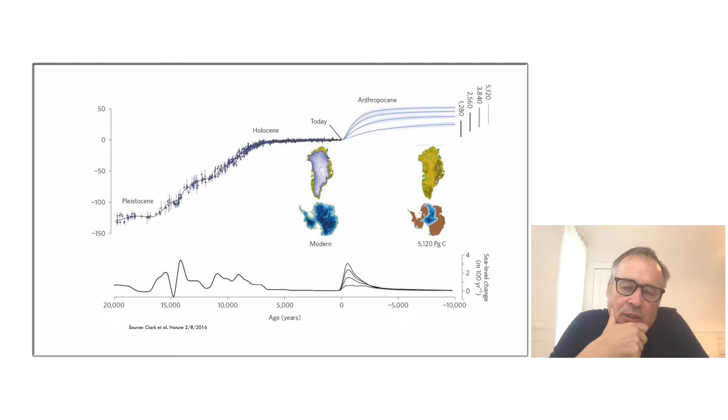One of the things I've come to understand is that we are going into an extremely turbulent period. If you look at this chart from Nature, the big picture of changing climates and changing sea levels, you see that we come from a very stable period, and now with the Anthropocene, the era in which we are changing the workings of our Earth systems, we are going into a period of great change. That great change will at some moment start leveling off, but in a really different condition than we are now.

As someone who is from the Netherlands and who lives in New York, which are both sort of coastal places, as is Malmö, these are things that we need to consider.

What I want to do today is lead you through three continents and see how in different continents we are working differently on adapting to climate and dealing with risks. The first place is New York, where we have a practice and where we've been involved working in this city since Superstorm Sandy. The second place I'd like to talk about, toward the end, is the Netherlands, this very constructed landscape developed over the last centuries - how do you work in that landscape? And in between, I'll take you to Asia, to the north coast of Java, where I'll talk about our work using nature-based solutions at scale for a sinking and flooding coast.

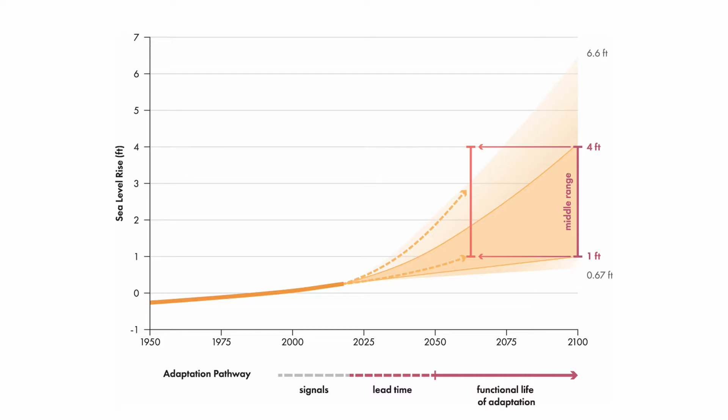So there's a strong connection between the physical infrastructures and the social infrastructures. About 60 people died, and the impact of this disaster on the city was dramatic, and it really caused the city to start thinking: how vulnerable are we? Specialists and professionals had been thinking about it, but for the first time it became public view that a city like New York is largely built in the floodplain.

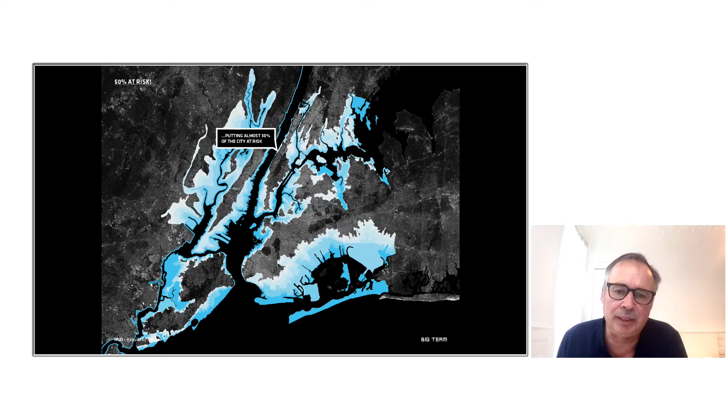It is at a high risk of flooding for which it is unprepared. It doesn't have, like the Netherlands, dikes and protective systems. It is pretty much open to the water. And part of that fragility is caused by the fact that the water has for a very long time been a source

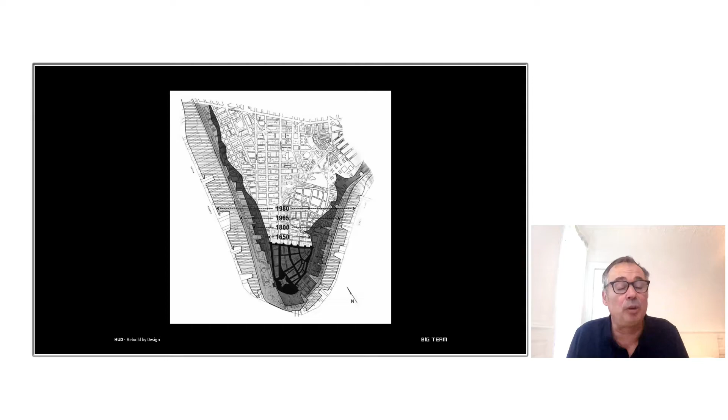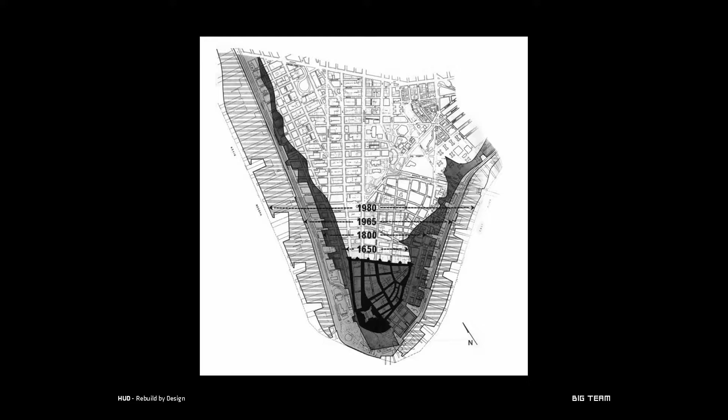of economic growth. We have placed our port areas there, we have reclaimed land — you can sort of start blaming the Dutch for that in the case of New York. In the 20th century we put our infrastructures there, we put our highways there. So we have increased the vulnerability of our lands over time,

leading in Lower Manhattan to a rather deep flood zone, as you can see in this image. At some points, the flood zone is about 6 blocks deep, and you could imagine during a big flood a river connecting the two sides of Manhattan, basically charting Canal Street.

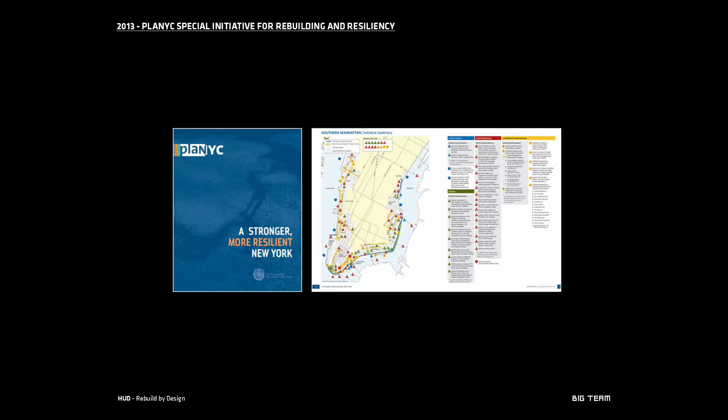The city had proposed, after Sandy, in a special report, a whole host of measures to start adapting to this climate change and storm risk. One of them was an integrated flood protection system around Manhattan.

Temporary solutions at this scale don't really work, and at the same time a wall also would not really work. So what we did is we took our cue from the High Line, where we have a piece of infrastructure that is not used anymore, that has been made into what you could call a social infrastructure, an amenity that has really revitalized a neighborhood.

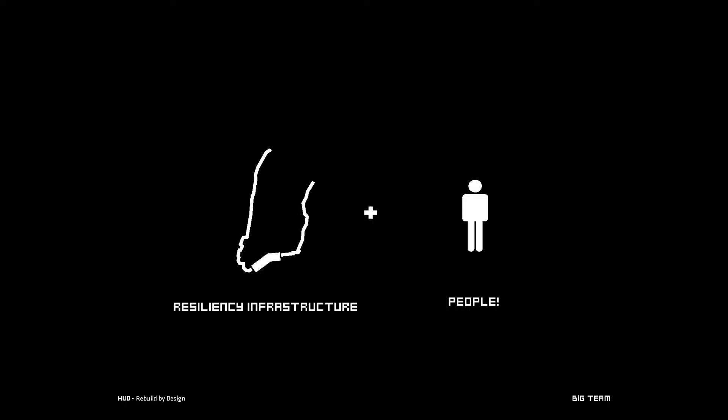And we thought, well, maybe we don't have to wait until infrastructure is not used anymore. Maybe we can start to think about program in relation to that infrastructure very early, because program allows you to think about people — and maybe we can connect the resiliency infrastructure that New York needs much stronger to people and to program.

That led to this idea called the Big U, in which we reconceptualized this large piece of 10 miles of infrastructure as a necklace of smaller infrastructures that would be connected and would protect this geography. By thinking it smaller, it allows us to really tailor-make each piece of infrastructure to the geographic location and to the community it would be localized in. And it also allows us to build this thing in phases.

Our idea was really to say we need the big thinking of Robert Moses, but we need to combine it with the community-oriented thinking of Jane Jacobs, and maybe, as Bjarke says, we should make the love baby of these two. And once you start to come up with an idea like that, it became really clear that, especially in the United States, where there is no culture of doing public projects, and where we really wanted to connect to the communities, stakeholder engagement is a critical part.

It's not really the focus that we need to put on design per se, but really what we need to do as designers is engage all the different people who are in this space and who are thinking or affected by such projects. So we talked a lot to all kinds of public entities, but also a lot to the private sector and to the different community groups. In this competition, rather than really making a design at first, the focus was really outreach. It was connecting to people to understand what they want, but also understand how they go about making cities and how this would be different, because we need to start thinking about different paradigms of what a city could be in terms of a changing climate.

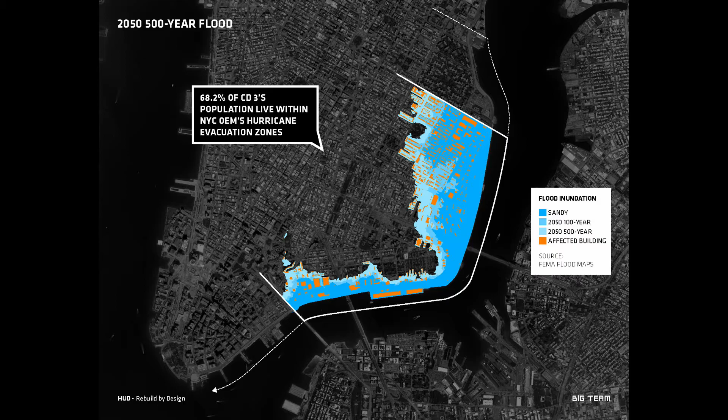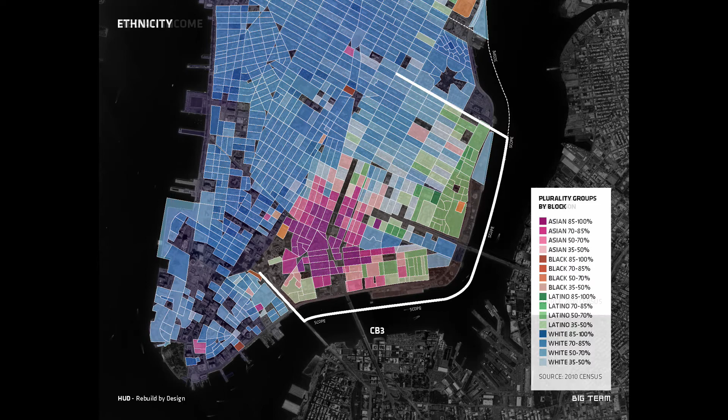Our main collaborator in this was a group called LES Ready, which stands for Lower East Side Ready, an umbrella group of a lot of community-based organizations, mostly on the Lower East Side, which has been heavily impacted by the storm, which has a very, very deep floodplain, as you can see here, which is mostly comprised of large housing complexes called, let's say, towers in the park, very much a product of the Moses era, which has a huge ethnic diversity. The blue parts are predominantly white, the green parts, where we were working, are Latino, and the purple parts are Chinese, which is much poorer than the rest of the city by almost a factor of 10.

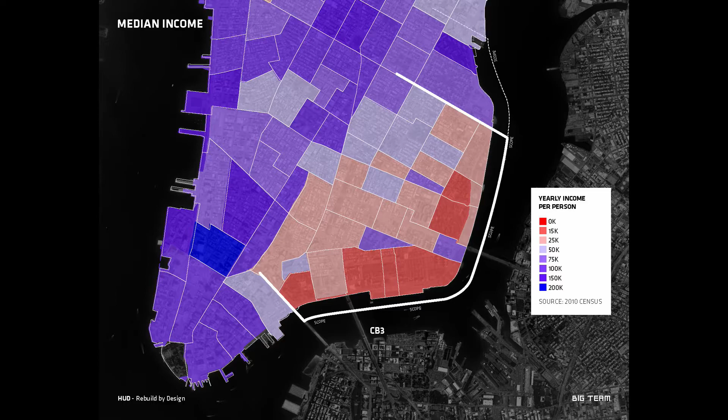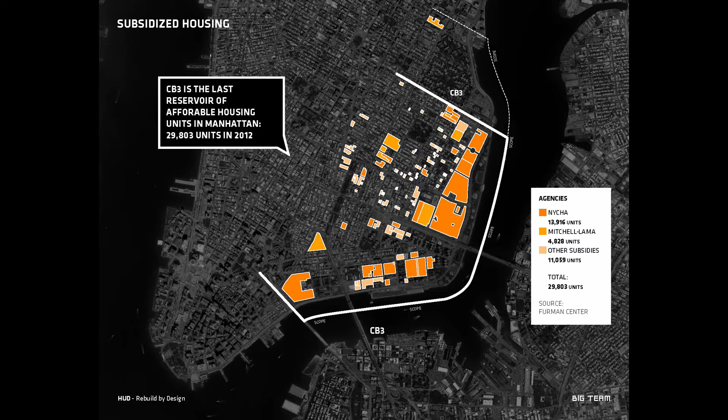If the average household income is about 200,000 plus in the purple areas, it is about maybe $20,000 in the reddish areas, which is, as I showed earlier, this sort of large repository of affordable and public housing in the city, which is all under great stress, not only because there's a constant disinvestment from the federal government in these type of houses, but also because of now repeated impact through climate events.

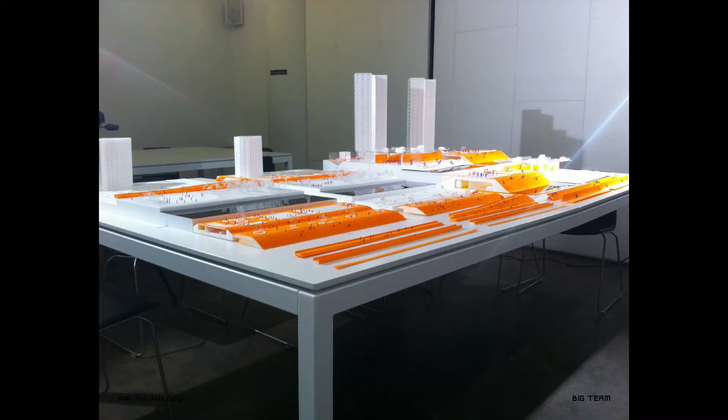Rather than bringing a design in, we brought in a series of models which would have typologies of how you could start to contemplate protecting the coast. Some of those ways in which you could approach it were more like urban furniture, which could have a double function as a social infrastructure. Some of them would be much more integrated into the highway systems or into buildings, but others would be very comprehensive solutions, basically covering the highway, creating a levee, putting a park on top.

What we did is we brought those models into the different communities and then basically had conversations with the communities about how we could start to utilize these solutions in their area. So rather than us as designers coming with a vision and a design idea and starting to sell that, what we really did is we tried to work with the communities on coming up with the right designs.

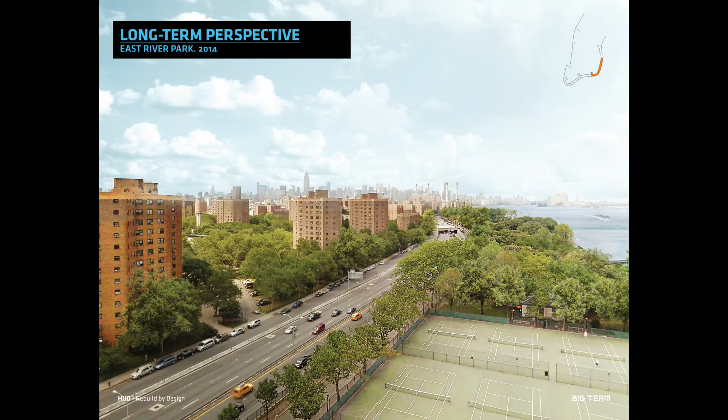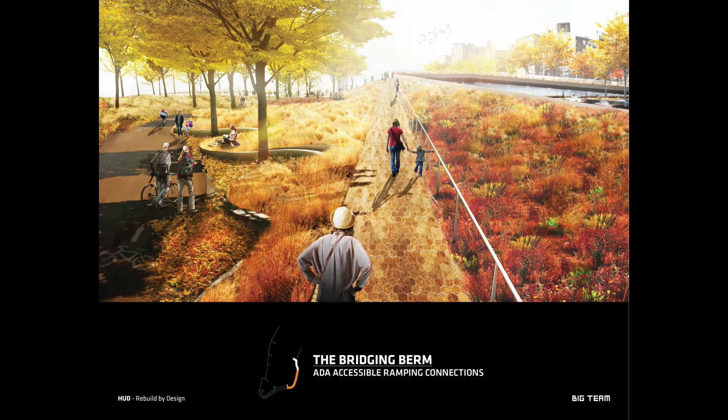And there you see that communities are really fantastic because they have so much knowledge about a place. They have such great ideas about what is needed, that it really allowed us to make a design that is extremely tailor-made. At the place I just showed with East River Park, we'd elevate the surface road in order to create a coastal protection system, but then use that elevation to cross the highway, which would allow this park to finally be used by the neighborhood, because the park is very badly connected to the neighborhood. We're envisioning what that could be in the longer term future, using what we call a bridging berm, which would connect the neighborhood to the river.

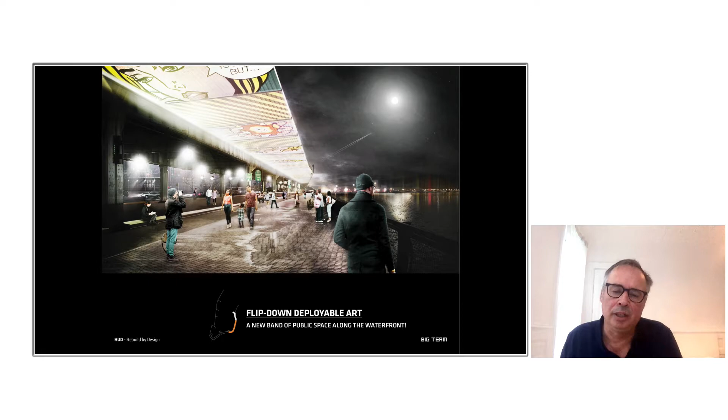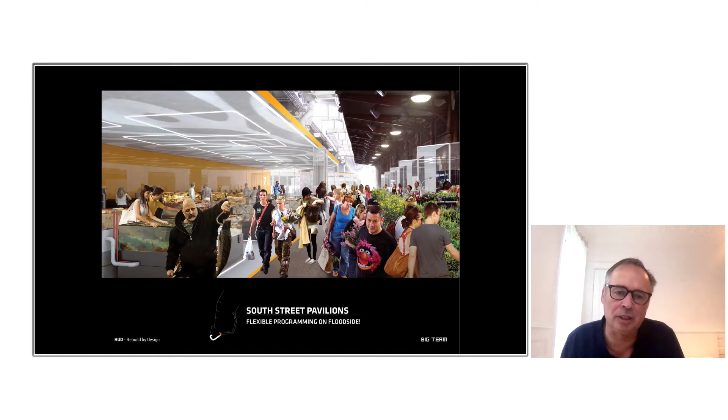At other places, for instance, where the highway is elevated, different tools or solutions would fit locally. These are not so nice spaces, particularly at night, so we thought maybe we could conceive of a public artwork wall during storms as a flood protection system. Maybe a bit further down, we could build pavilions or markets under the FDR, temporary uses that could double as flood protections, with openings at the right spaces in order to make sure that the vistas to the water were still connected.

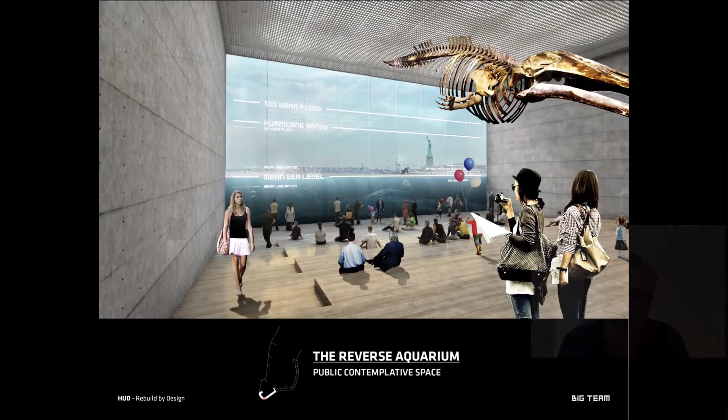And maybe even further down, we could integrate the flood protection into new amenities that the neighborhoods needed, including what we call a sort of reverse aquarium, which was really focused on having people understand these changing conditions for the city.

Because if the Big U is anything, it is not only a practical solution which protects against floods, it's not only a social infrastructure that can be used for the 365 days, or 364 days, that it doesn't flood, but it's also a project to have a different conversation about the impacts of climate change in the city.

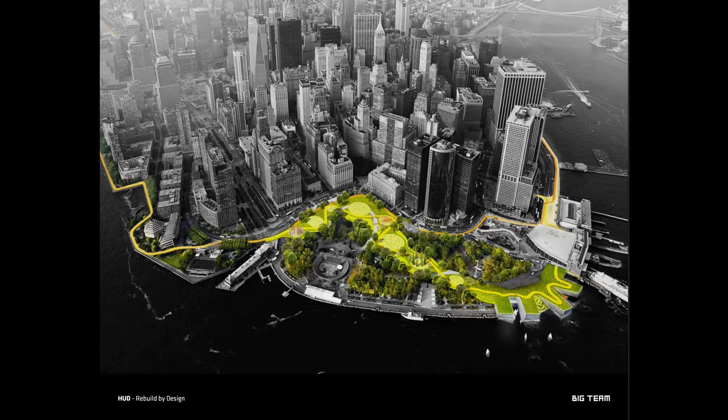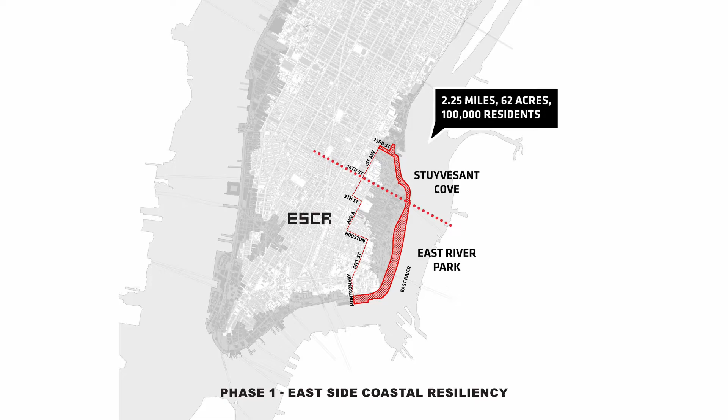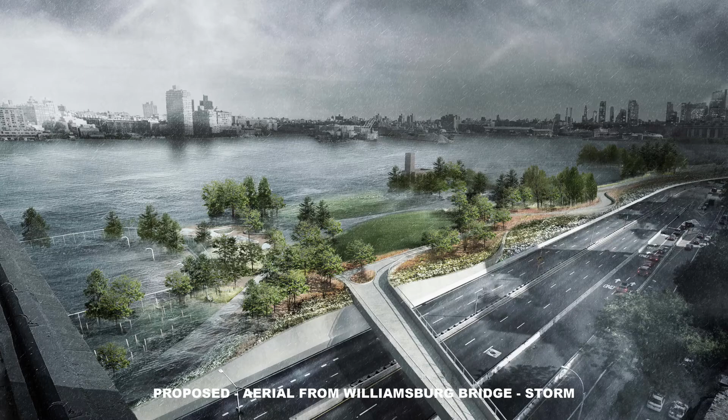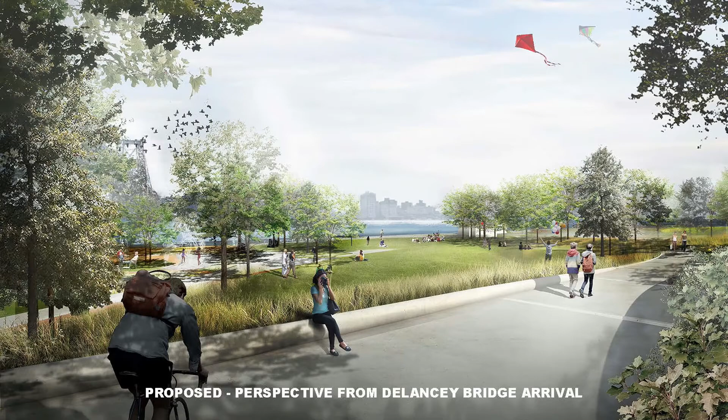And this is the sort of well-known picture of that project. We won the competition, which meant the city was awarded a large sum of money to start implementing it, and that led to the first project out of the Big U, the East Side Coastal Resiliency project, which spans the geography of the Lower East Side alongside East River Park, which is being reimagined with much better connections and more space for passive recreation—a more optimized park that at some moments could flood, and was really thought of as a place for the community.

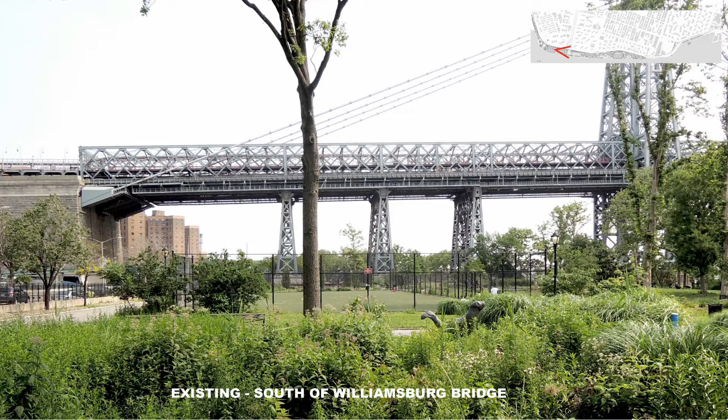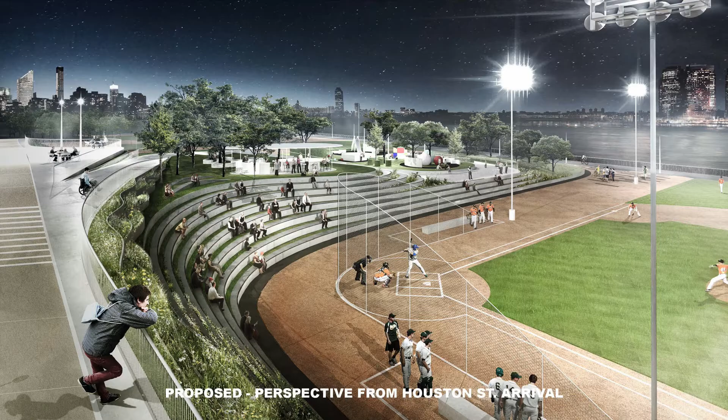So what happens in New York, a place that is really unprepared for climate change and has a very vulnerable coast, is that climate change became a way to reimagine that coast, to fix some of the inequities in that city, to really focus investments into these poor communities, and is used as a vehicle to start to bring a conversation about climate and risk into the public.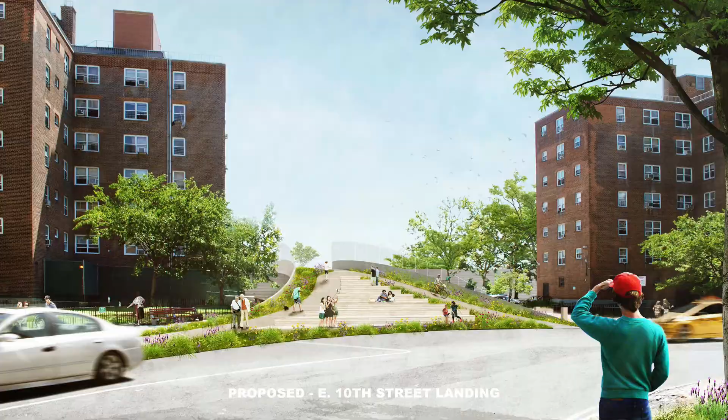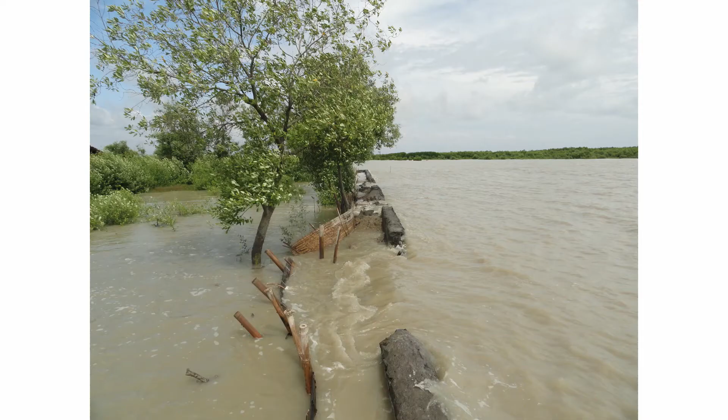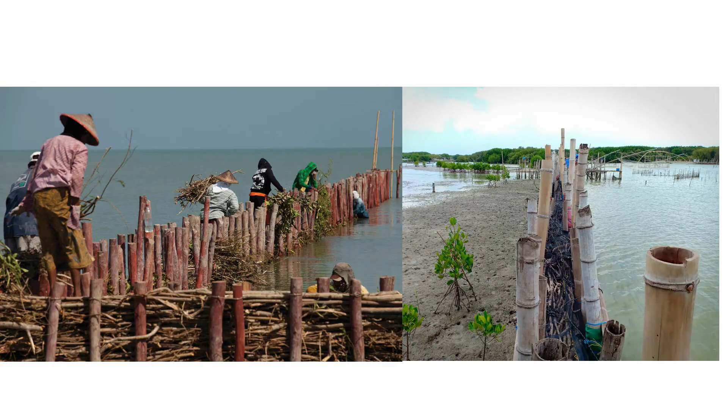It's sinking because of subsidence, and it is drowning because of rising seas. In Java, you see how the traditional infrastructures, the flood walls that have been built in the past, are not strong enough to deal with these forces of nature, and are starting to crumble and sink right in front of you. So there, we discovered that there are really different types of solutions needed to deal with these complex dynamics of water and soil.

There, the solutions needed to be much less traditional engineering, which is still a large part of the Big U. We are working in the United States in highly constructed environments, but here we need to bring back an understanding of nature and use nature-based solutions, or as we call it, building with nature, for large hydrological projects.

The way we have been working there is in a consortium called EcoShape, which consists of engineering companies, dredging companies, knowledge institutes, not-for-profits, and us as designers. We have been looking at whether we can save and strengthen this mangrove coast using the forces of nature, by building bamboo fences along the coast that help to trap sediments, which can then form the basis for new mangrove growth.

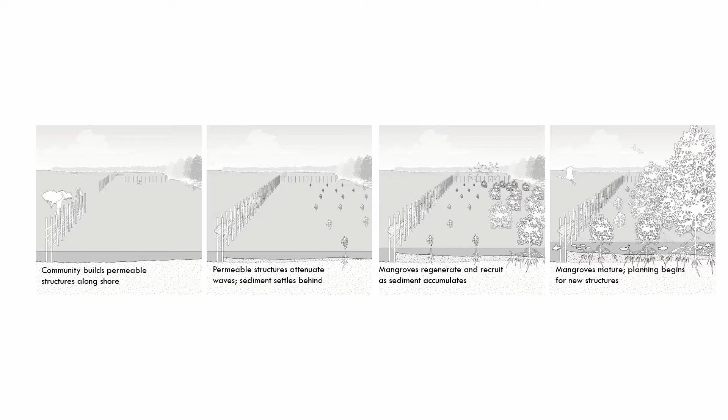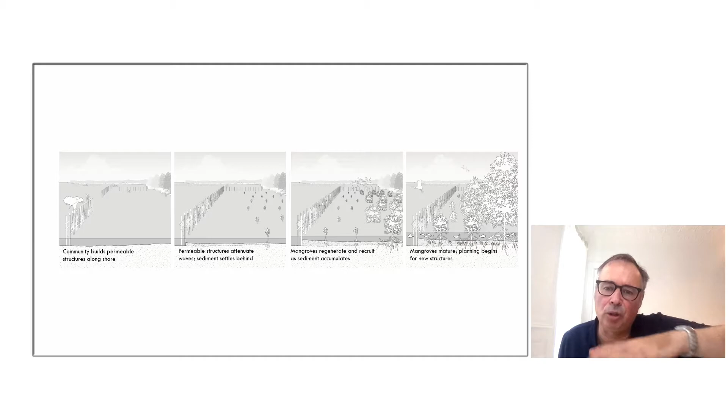So here you see how EcoShape, together with the local community, is building a new system for coastal protection, which also has other benefits by making these permeable structures that on the one hand reduce waves, but also allow sediment to settle behind them, forming a basis for mangroves to regenerate much stronger. And as these mangroves mature, they form a strong coastal belt that is both protective and provides ecosystem services.

What mangroves do better than rainforest is sequester carbon. They do that really well because they allow a lot of the carbon to settle and be stored in the soil. They perform more ecosystem services in the sense that they attenuate wave action, and of course they're a great resource for improving biodiversity and strengthening ecosystems, which is very important for the local population, because the fish that is spawned there can subsequently be fished and brought to markets, as can the crab.

So what you see here is that as much as the New York project is a project of social design, this is also very much a project of social design, where working with the communities through these problems and engaging them not only on the risks but also the benefits is really critical for its success.

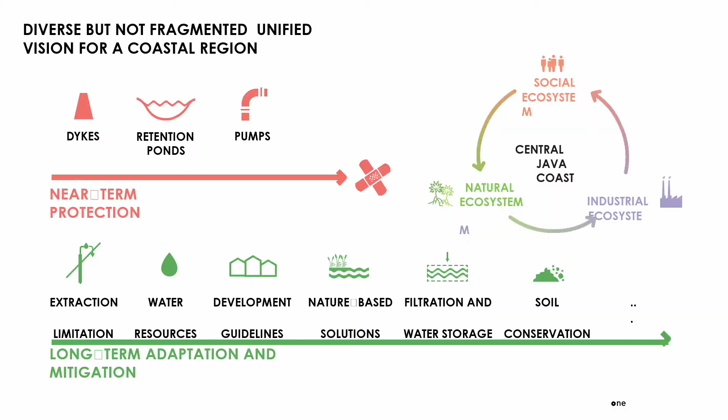We are becoming very aware of this because of a changing climate, but not only that—all the other risks that have come with traditional industrialization. We now need to employ much more integrated and systemic thinking about how to address these issues in rural areas as much as in urban areas.

A third area I'd like to bring you to is the Amsterdam metropolitan area, because we still have a firm there. I've had the benefit of a lot of knowledge that comes with building a very international practice. For us it was really interesting to be asked back into the Amsterdam metropolitan area to think about their climate adaptation planning. The Amsterdam metropolitan area has about 3.5 million inhabitants, centered around the city of Amsterdam.

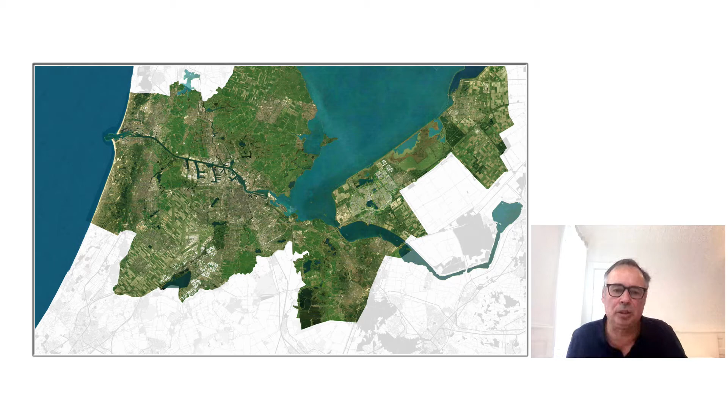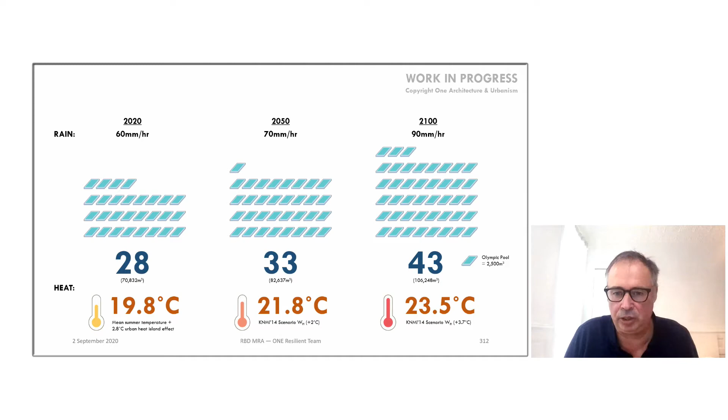It also became really clear that we are moving into a completely different climate condition. We have to start calculating with significantly more rain, which we visualized using Olympic pools—this is an image from a particular site—and much higher temperatures towards the end of the century. In some way, the climate in Amsterdam will start to look like the climate in Umbria now, which might feel nice in winter, but not so nice in summer.

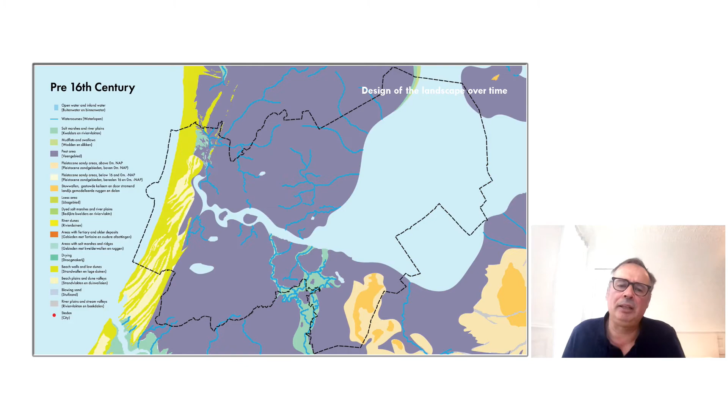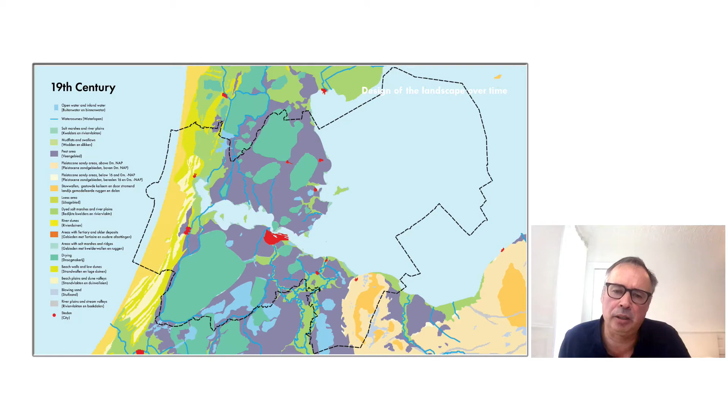To understand what we could possibly do there, it was important to map the development of this Dutch landscape, which over time has become a very much constructed landscape—where, as technology allowed, we would drain lakes, put dikes around them, use windmills to keep the water out, and use that as the basis for urbanization over time. The area we'll look at later is a polder that was only pumped dry in the 1960s.

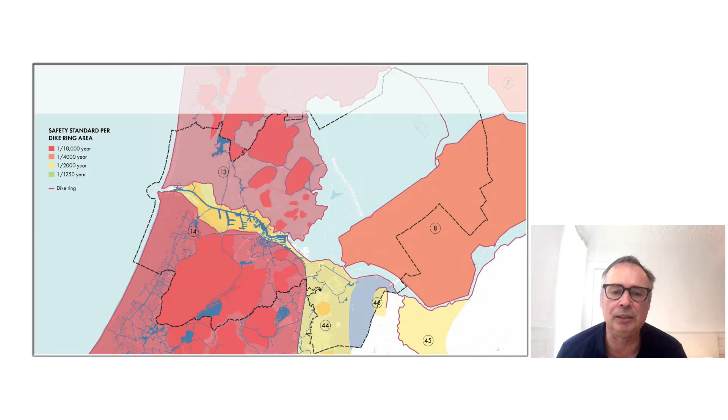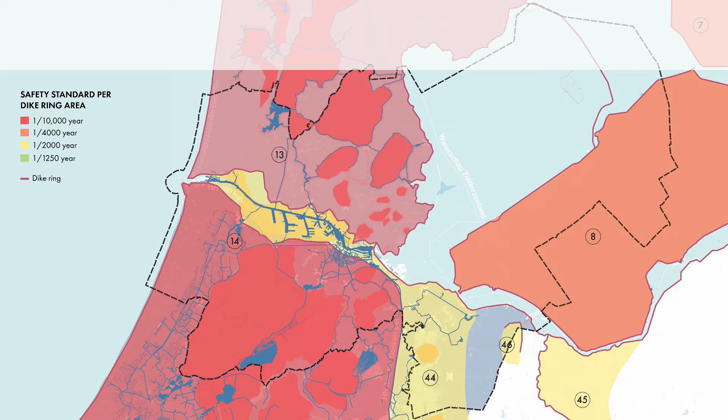Much of this area, as you know about the Netherlands, is below sea level, so it's protected by a number of dike rings. In the Netherlands, we're really thinking about how long such a system is sustainable—we have canals, a large number of locks, pumps, dikes, and polders in order to maintain that system. But as I showed you with sea level rise in the future, we could see as much as 15 to 25 meters. Of course that's centuries away, but in the Netherlands we're starting to think about what that means for this fragile technological construct we've made.

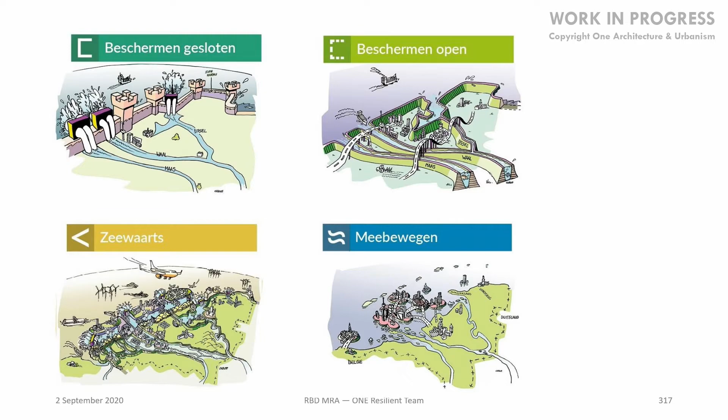In the Netherlands, we're starting to think about different scenarios for our future. The aspect of time is very interesting here. We think, for instance, that the scenario on the top left could be sustainable for the longest time—a scenario in which all the water from the European hinterland is pumped out into the much higher seas we'll have in the future. This is a system that could work for at least another 100 years.

It's a system that's slightly different from another approach to higher seas, which basically says we need to let the rivers flow naturally into the sea—but that would require huge dikes deep into Germany. Our current system requires a lot of buffer capacity to make sure that before the water is pumped out, we can buffer it somewhere during great storms or heavy inflow from the rivers.

We're also thinking that maybe, for extra buffer capacity, we need to extend our coast in the system to the left and create a series of artificial lakes to buffer the water coming from the east.

And last but not least, there's a scenario identified as 'moving with the water,' which basically says that apart from our big cities, we need to leave the coastal areas in the Netherlands and move into the eastern part of the Netherlands, or move to Germany.

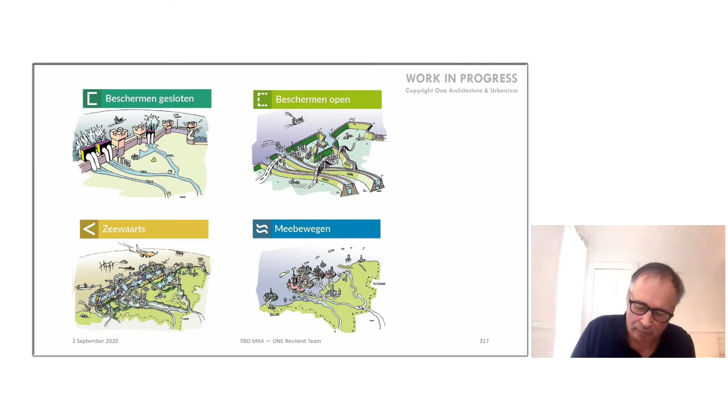This is really interesting, because once you start thinking about these long-term futures, it means that the technical system we've built now is very fragile or brittle—we're working on an increasingly sophisticated system that cannot deal with the levels of change coming our way.

So one of the things we say is: if you want to build a much more resilient, future-proof system of water management and land use, we need to increase the buffering capacity, but we also need to increase the tolerance, because the variations in rainfall are going to be much bigger.

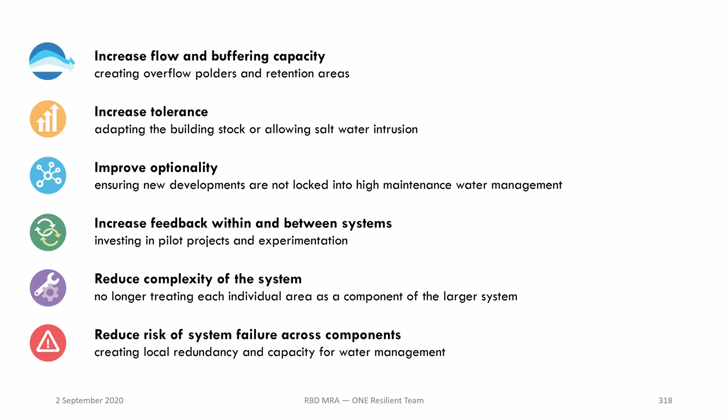We need to make sure we can move toward different scenarios, so we need to improve the optionality. We need to learn more about how we adapt to these changing systems. To do that, we also need to reduce our complexity and make sure that not everything is connected to everything, because once everything is connected to everything, one thing going wrong can make the entire system collapse.

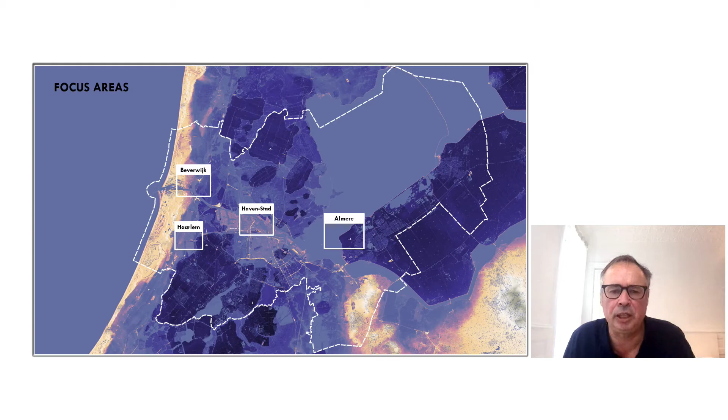So for this project, we said let's prove in a number of concrete projects how this thinking can start, and how we can do area development that's much more future-proof—which in the Netherlands means starting with ensuring basic safety, but also disconnecting local developments from the system, increasing tolerance, and thinking about the longer term—not 10 or 20 years, but really putting our time perspective at around 100 years.

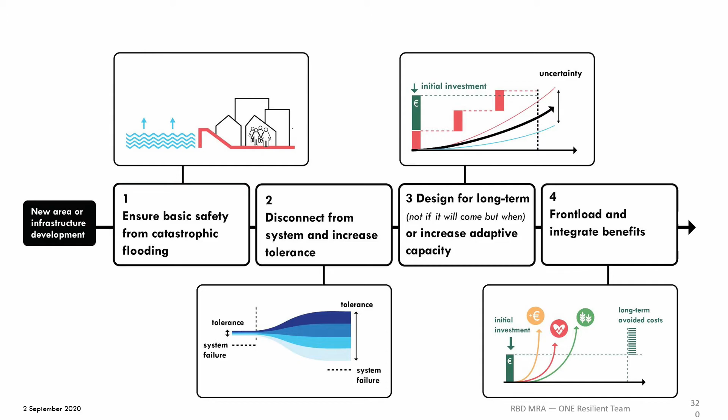When we do that well, we can start thinking about nature-based solutions, and those are attractive—we love those. Let's bring those in and let people enjoy them much earlier, because that would also increase the economic feasibility of those types of solutions.

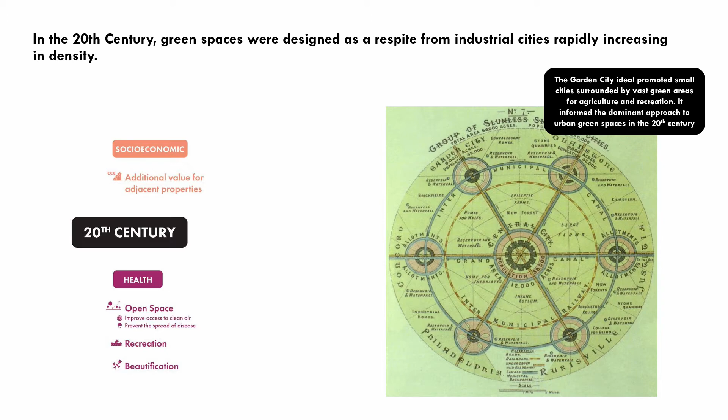So in this particular area, we said we really need to reconceptualize how we approached green infrastructure in the 20th century—very much driven by the garden city ideals, with a limited set of functions—toward a green-blue infrastructure that has many more ecosystem services, that doubles as social infrastructure, and that allows us to mitigate, improve our health, and gain ecological benefits, while really weaving it into the life of people.

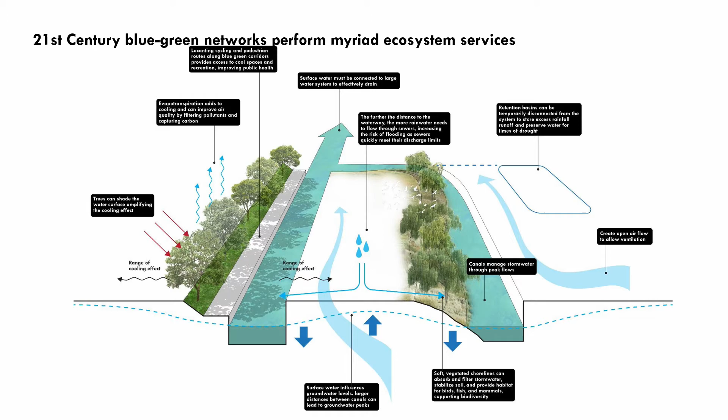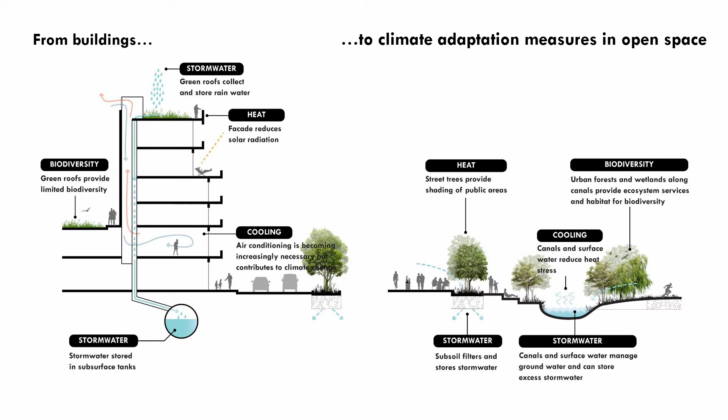So we shouldn't think of this as a technical, monofunctional system just about managing water and maybe giving people access for recreation, but really think in a much more complex way—about what kinds of things we address in buildings and what kinds we address in public space.

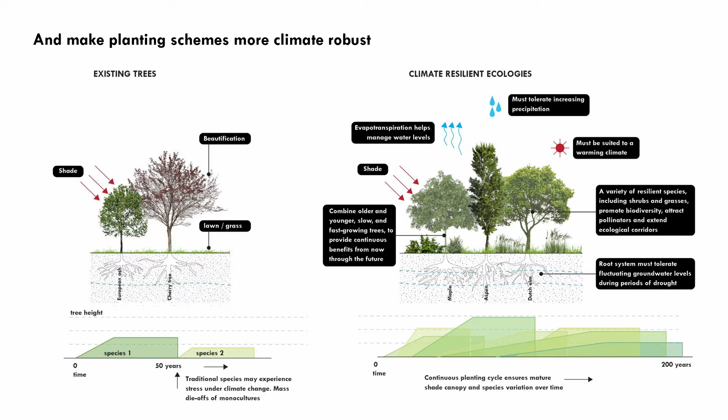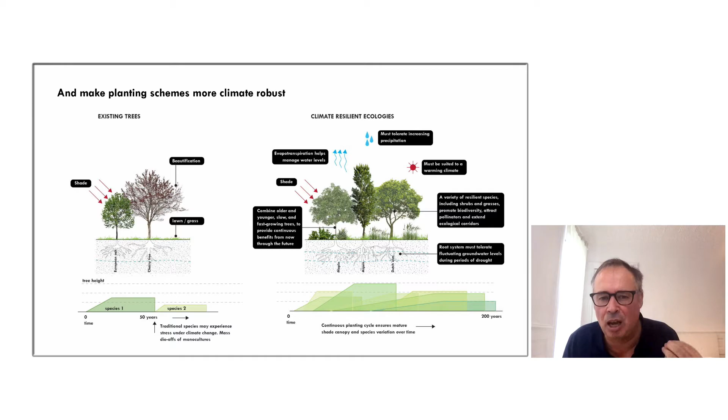We need to rethink our use of species in this, because we're in a changing climate and the stresses are becoming bigger. We really need these green-blue infrastructures to deal with those stresses, which means they become much more important. We might even think about wind directions when deciding on open spaces, and then reimagine these types of developments to be much more future-proof.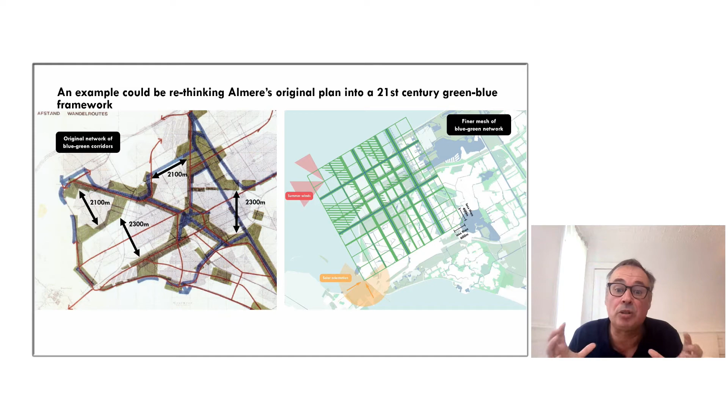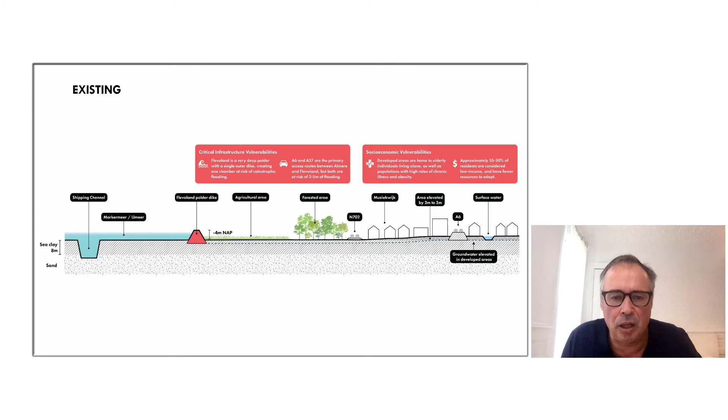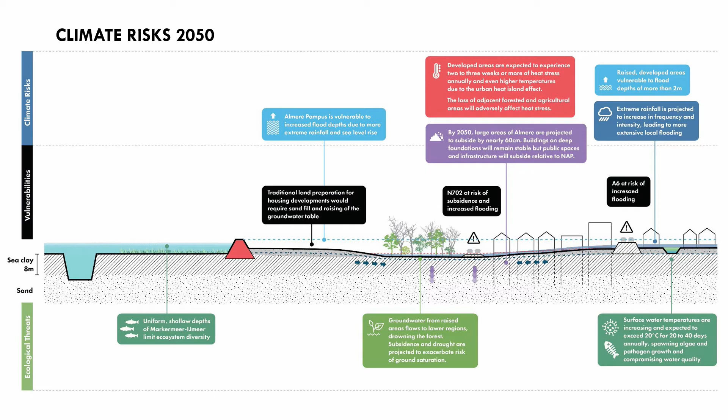And in this particular place where we have climate stresses, it is an area that is below the sort of Dutch inner lake, and these are some maps, some transects where we start to show how these climate stresses are related to each other, both their physical components as well as their social components, the ecological realm as well as the physical realm.

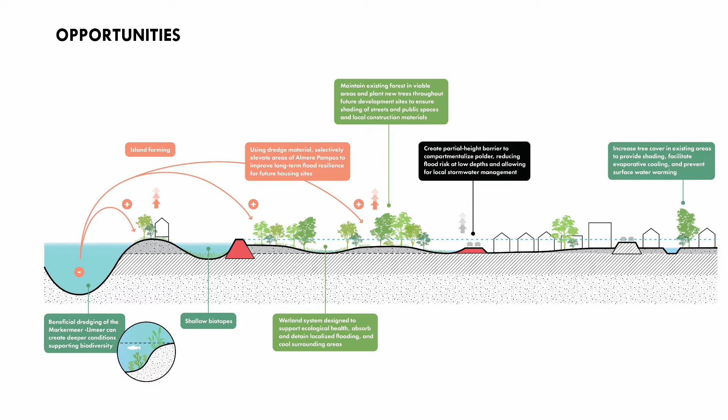We start to show how these things are related to each other, and then we start to derive maybe solutions where we can say, well, if this lake is ecologically dead, we can change the depths and ecology in that lake to make it ecologically more diverse, but also use the dredge material to increase the levels in this particular area where we need to build, so that the subsidence risk and the flood risk is reduced.

So these are the type of projects that EcoShape does in those lakes, which is again building with nature, using the dredge material and the sand to construct new nature by building dikes and pumping the sort of sediments in those dikes and using that as a basis for nature development.

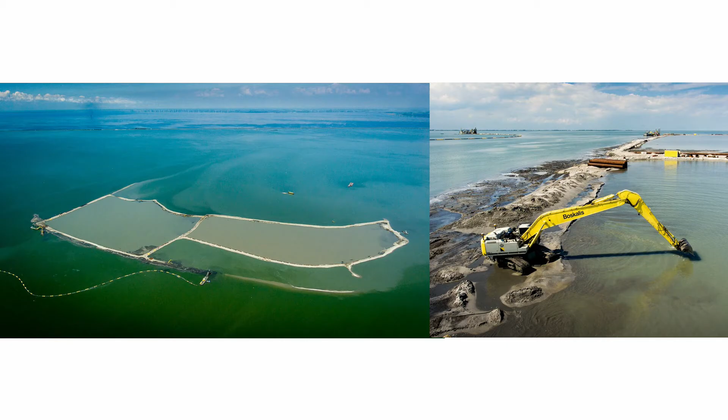This is what this sort of large-scale infrastructure looks like, but this is what it can become, and you already see that this is the bird watching house, so you can create all kinds of recreational amenities there.

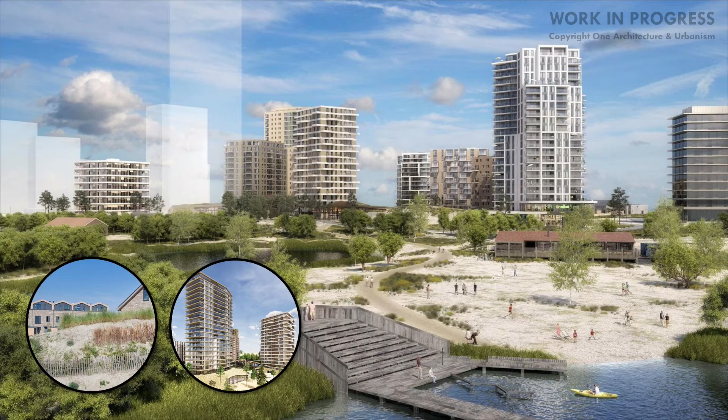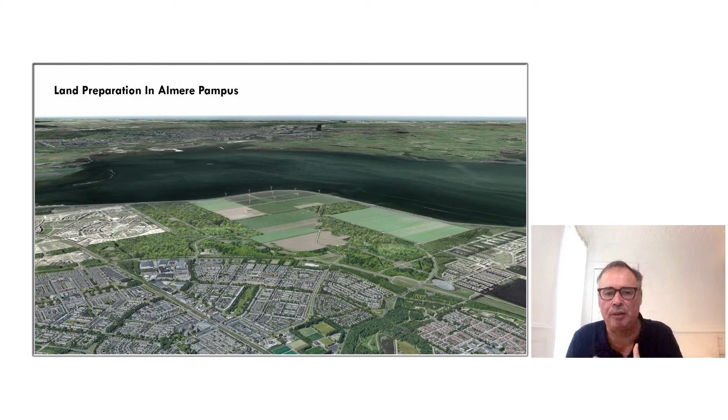And we can then start to rethink how we use those sediments on land to start to make new environments, maybe even dunes. So our idea for this area, which you see here visualized, is to say, well, let's not wait until we need to build there. Let's start building nature now, because once we start to build this nature now, we will have everything in place that we need in order to build good neighborhoods.

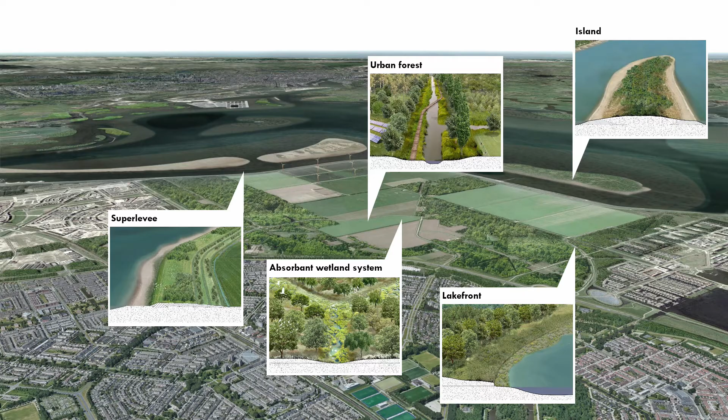So basically, we needed to undo the 20th century technical systems and reintroduce, albeit in artificial means, much more ecologically nature-based, well thought out solutions in order to create the layers that would allow us to deal with these future risks that we are having there.

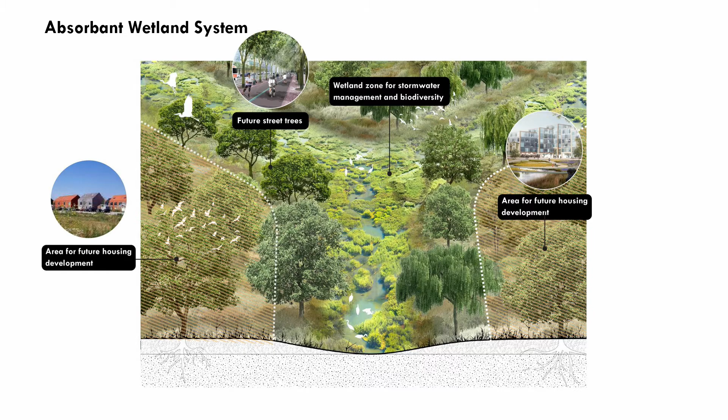So creating wetlands while setting apart areas for future development. What is great is that once you start doing that now, nature will have grown strong enough so that the benefits can be used immediately after when the people move to that area.

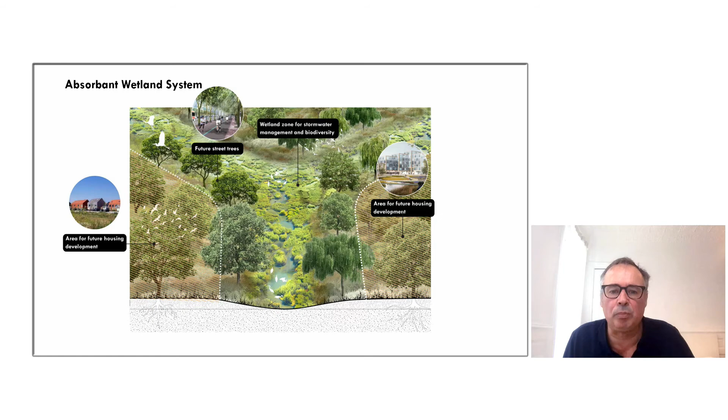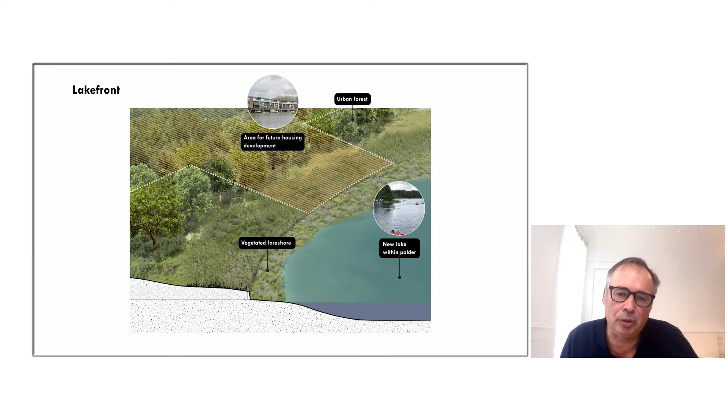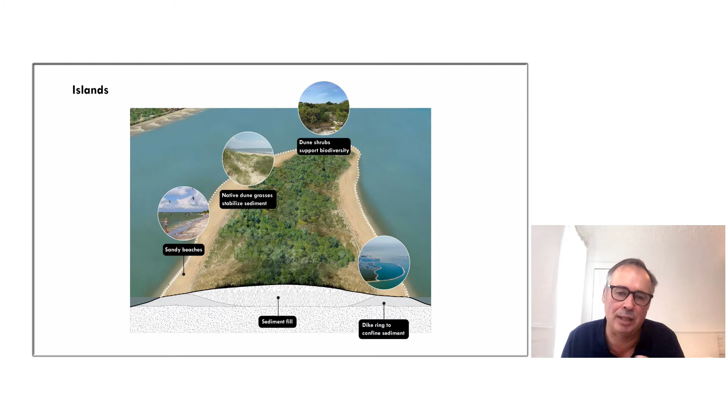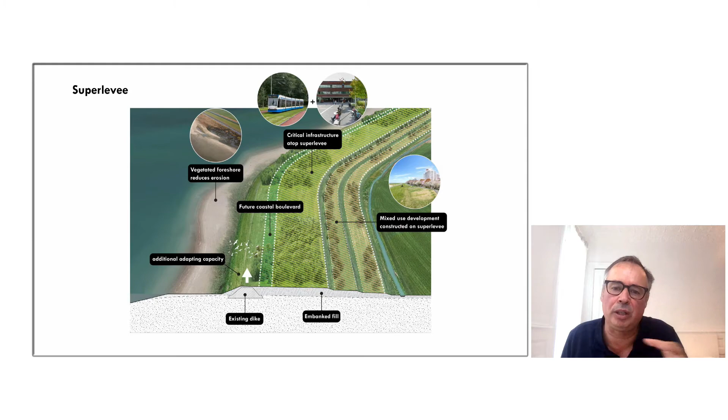You can start to think about temporary uses. You can start to create new lake environments in order to buffer all that water. We can find ways to be smart with this sediment to expand these building-with-nature, artificial islands, and even build some areas where we are raising the coastline in order to make sure that the connection between the city and the water is stronger, but also that is the area where you would put your critical infrastructure in what you could call a super levee, where you would have the evacuation in this lower lying area.

So this would be a sort of vision for a future of the Netherlands that really starts to reconceptualize our technical systems to be much more inclusive, to be much more thought in terms of growing over time in order to deal with these ever increasing risks.

Because I think that's really, and I'll conclude there, the change that we need to have in designing with risk, in designing for uncertainty, is that we need to use the capacity of our natural systems and bring that back into our urban environments in order to deal with change and in order to deal with the uncertainty that we have.

Because if we continue on a path of technological optimization through harder infrastructure, we create environments that are brittle and that cannot deal with uncertainty and risk. Thank you very much.

I don't hear you. You don't, right. I hear you now. Yeah.